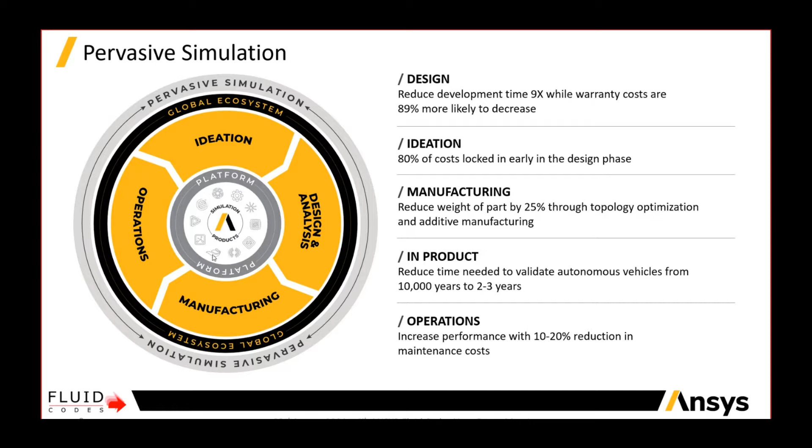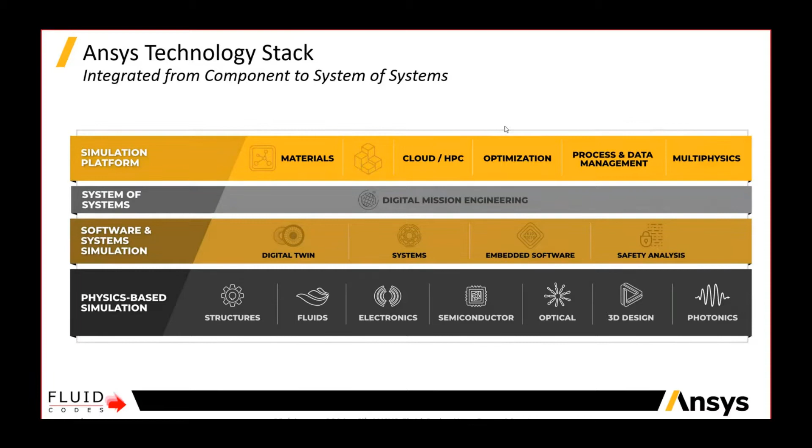On top of that, we have a set of tools that allows us to go on the cloud and process and manage the data, as per the previous presentation by Anne and Johan, of course in a multi-physics approach. So everything is there - this is an overview about the Ansys product portfolio. All the main physics are there, and as you can see, there are so many products. The effort in development at Ansys is going to give you more and more options, features, and capabilities through all these simulation tools - for electronics, fluid dynamics, and structures. There are so many, and we have little time to go through them.

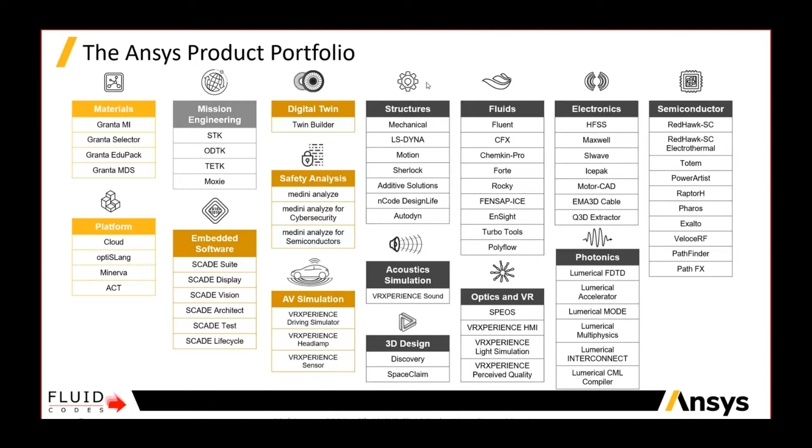Let me guide you through the Ansys 2021 release update for the main applications. I'm a CFD guy, so let's start with CFD. We can look at Fluent, for example, and there are many enhancements here.

For example, the user interface - there's a lot of new options for customization, for example the view, the dark theme is one of them. This improves the user friendliness of our graphical user interface, and we can also apply energy saving options. Of course, we are eco-friendly, so we want to improve that too. So why not?

Another kind of improvement relates to expressions - there's a lot of new features, like improving the readability of expressions using different colors or text styles to highlight what we are doing and what kind of information we need to input. There are new reduction functions, accessibility to new information, and applications for boundary conditions or post-processing purposes. So more flexibility and applicability of expressions.

Embedded windows and hyperlinks - again in terms of usability, we have this option available where new plots can be embedded in windows, so we can track during runtime what's happening in terms of monitors, both in static images or during the capturing of animation frames.

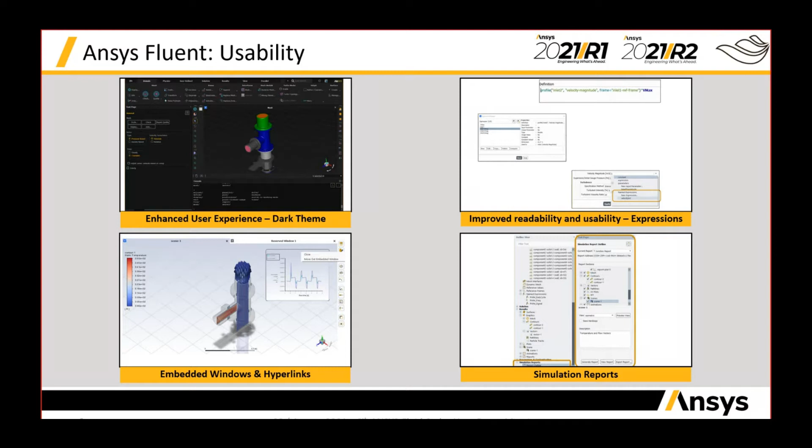Moving forward, if you look at the Fluent meshing development, this is an important task when dealing with simulation, since pre-processing and mesh generation is one of the main tasks we have to fulfill. So we need more usability on the meshing tools, and this is something that has been done in the last few releases on Ansys Fluent meshing, basically changing the settings for the clipping plane. Before it was just aligned to the axis. Now it's completely flexible, so we can put it as we wish.

There are also a few advancements for the progress bar, a smarter way to get this information. Based on experience, the progress bar itself is learning something, so it's getting more and more accurate with time using different simulation approaches. So this is another interesting thing.

And the common fluid formats, CFF formats, are completely extended. So we can save and load H5, HDF5 format mesh files.

In terms of transformation, we can extrude volume mesh. For example, on the inlet section or outlet section, we can extrude normal to the boundaries. This is especially used in case we want to stabilize the boundary condition, particularly for pressure boundary conditions. So we might need to extend the domain a little bit, and in the past this required going back, changing the geometry, remeshing the model and everything. But now we can simply add an extra task in Fluent meshing in order to extrude a bit out of the boundary condition to get this stabilization of the boundaries.

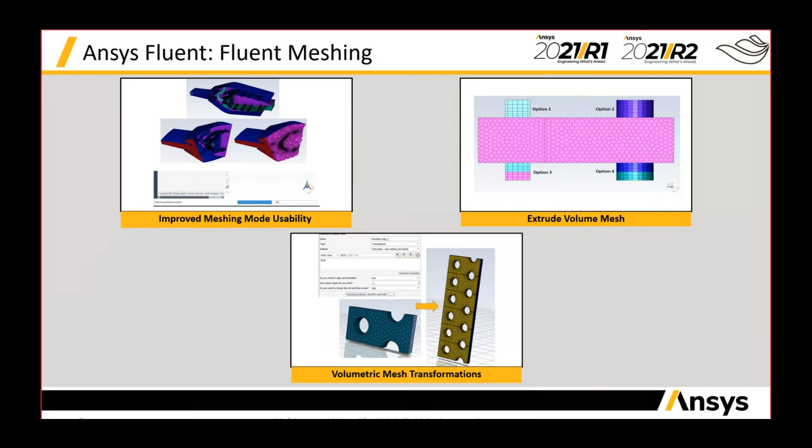When it comes to the solution mode, switching to the solver, we have a lot of advancement in multiphase. There's enhancement in volume of fluid applications, with a lot of improvement to get high fidelity solutions with improved adaptive time stepping and interface tracking, specific for this kind of application.

As I mentioned at the beginning, there are a lot of trends we are trying to address, especially electrification in automotive and aerospace. There's a lot of application related to gearboxes, so a lot of developments in this area to address fast spinning gears, splashing, this kind of multiphase with all the gears and details of the flow. There's a lot of effort in this application to improve robustness, accuracy, and speed up of the solution.

In the same way, if you look at DPM, the discrete particle model, again a lot of improvements here for better accuracy and HPC scalability. High fidelity tracking in case of dense particulates and overset meshes, and on top of that, scalability, pushing harder for complex systems and large cell count domains. So we have that covered with new applications and new solutions.

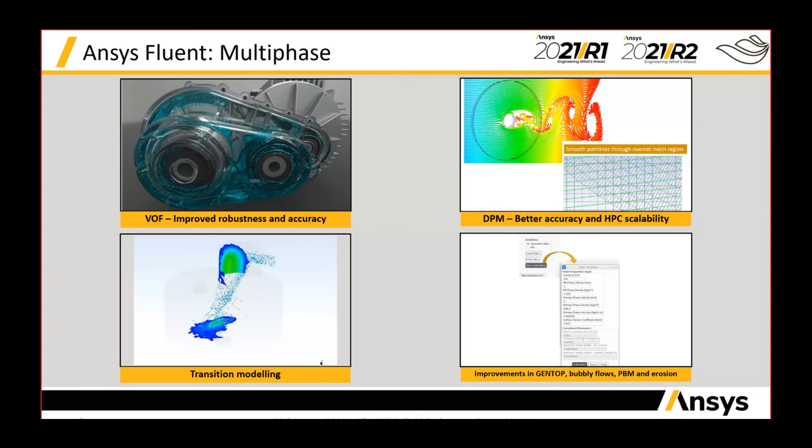Heat transfer and combustion, a lot of developments here, to accelerate the transient conjugate heat transfer.

Combustion modeling. In combustion modeling, again, a new trend, a very strong trend nowadays, is decarbonization. So there is a lot of improvements here. For example, the flamelet generated manifold has been completely revamped, and there's addition of new fuels like diesel and jet A1, for example, for particle injections, and everything is done in this frame of decarbonization.

So there is a lot of developments also for hydrogen combustion, hydrogen blending, and so on.

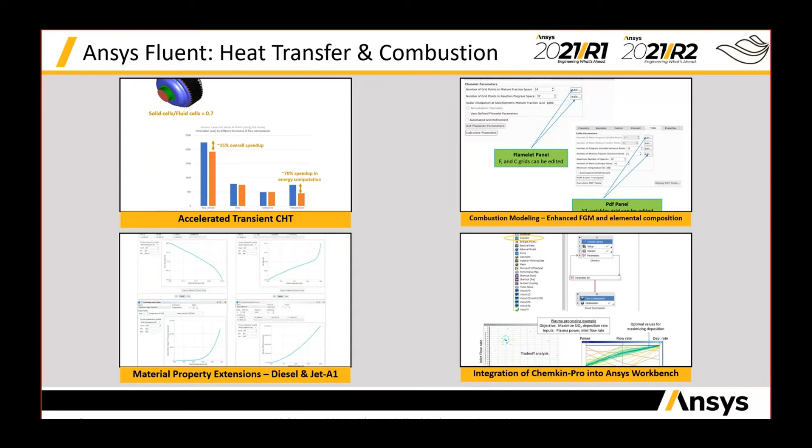Another important thing to mention here is the full integration of Chemkin Pro in Workbench. Now we can drive all the input parameters of Chemkin Pro in Workbench. That means we can get the output, so we can run simulation in an optimization frame, design of experiment frame, sensitivity analysis frame, and on top of that, because of Workbench, we can run through the Remote Solve Manager on a remote computational resource.

Development on battery modeling. This is another trend, again, for electrification. So direct exposure of the battery modeling in the graphical user interface - before it was just an add-on. Because of this integration, we have direct access to new capabilities and simplification of the workflow for battery modeling. So there are virtual connections, standardization of the UDFs, and so on.

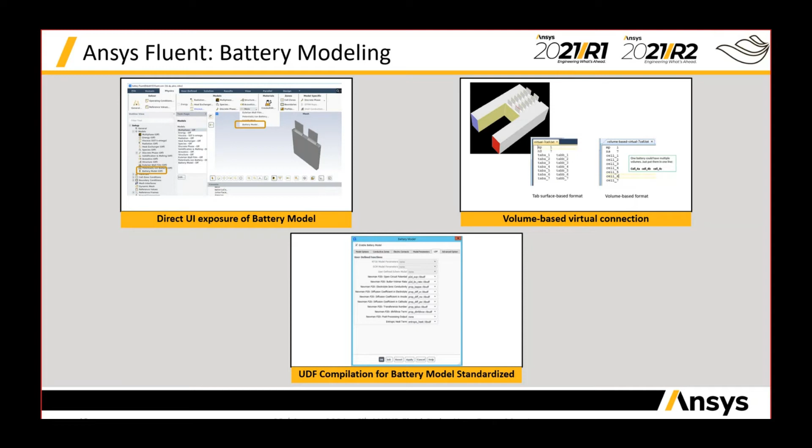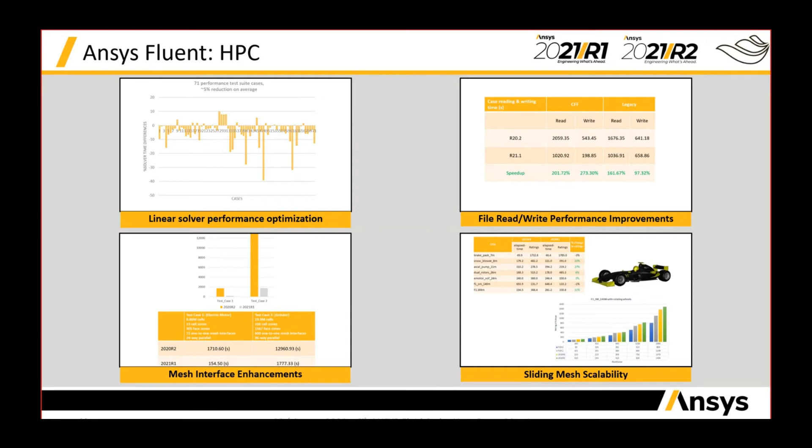Let's move now to the structural side. In terms of structures, there's a lot of implementation, mainly in Workbench, for the full integration of the many products available. So let's start looking into the meshing.

So there are new options available for repair topology controls in order to defeature the geometry at a mesh level, instead of going back, changing the geometry, and wasting our time doing that.

New capabilities to freeze and unfreeze the mesh through the geometry branch of the tree. Basically here we can freeze the geometry and force the mesh, freeze the mesh, in order to save some time when we are changing some parts of our assembly, some bodies in the assembly. So in this way, we can speed up the process here.

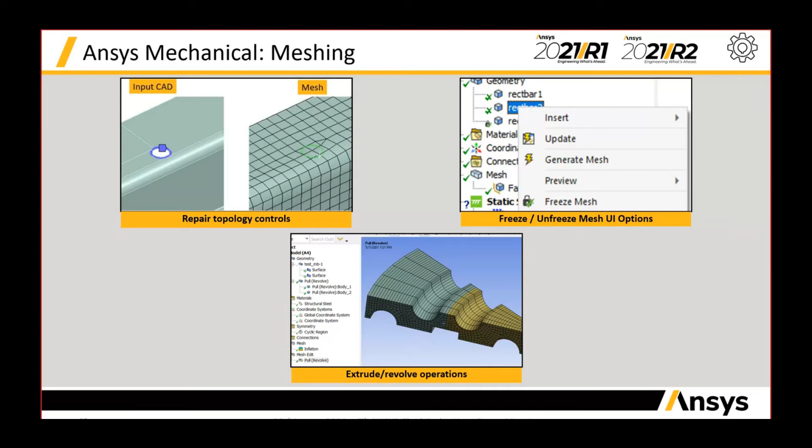Operation of extrusion and revolution, basically starting with a sheet body, then we can use a pull feature as a mesh edit operation in order to create this kind of 3D meshes. So start with a 2D mesh, and then we can directly extrude in the rotational direction or in the translational or rotational pull features in order to get the 3D mesh done in this way. So it's very easy and very fast.

Another advancement or enhancement in terms of system coupling, coupled field, new systems available in order to take into account complex physics, like the ones dealing with piezoelectric components, for example. So piezoelectric materials, there is a deep interest now in this kind of materials because of this electrification trend. So nowadays we want to solve this kind of problem. We have to add extra degrees of freedom, not just to the structural side, but also for the electrical part of it. So we need to have this complexity included into the picture.

Before it was done in a different way, now it is integrated in Workbench. So we have specific system coupled field for modal analysis and harmonic analysis. Something new here, something that allows us to go beyond.

New contacts. New contacts capability, for example, the projected 3D line to surface contact technology is now available. So in this way, we can optimize all these processes that before were giving a lot of issues.

Thickness. Now at the outline tree level, at the geometry level, we can use thickness scoping. So basically, we can add the thickness at elemental level. If you think of it, before you were just decomposing the geometry and applying at the shell level a different thickness to different parts of your device or equipment. Now we can go element by element to do this, giving a distribution of thickness at element level. So basically, you can see a lot of benefits here in the definition of problems related to erosion and corrosion.

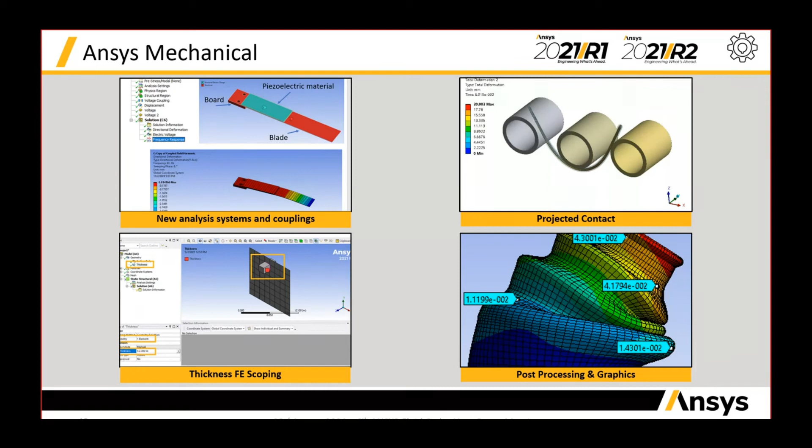Another advancement is related to post-processing. Now we have a lot of details like moving objects. So when we are magnifying the amplitude of the displacement, the probes are following the geometry, the deformation of the geometry. Before it was not like that.

Other advancement in LS-DYNA. Implicit features, this is an important feature to mention. There's a lot of flexibility added here, so we can switch from implicit to explicit in LS-DYNA directly in Workbench.

Advanced restart. Now we have a separate branching of restarting points, so we can add flexibility to, for example, add more parts in the restart.

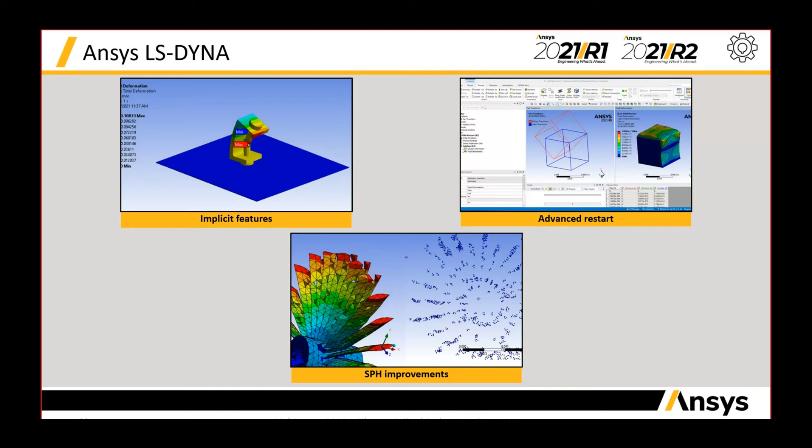And smoothed particle hydrodynamics enhancement. So we have a dynamic and automatic conversion of eroded elements into SPH particles. Improvements also in the arbitrary Lagrangian Eulerian method to handle large deflection, large deformation in both structured and unstructured ways. So from 2021, both of them are available.

A lot of enhancement in the contacts, especially for SPH applications. And something I want to highlight here in electromagnetics - solver enhancement also in this field, for example, including models for thermal runaway.

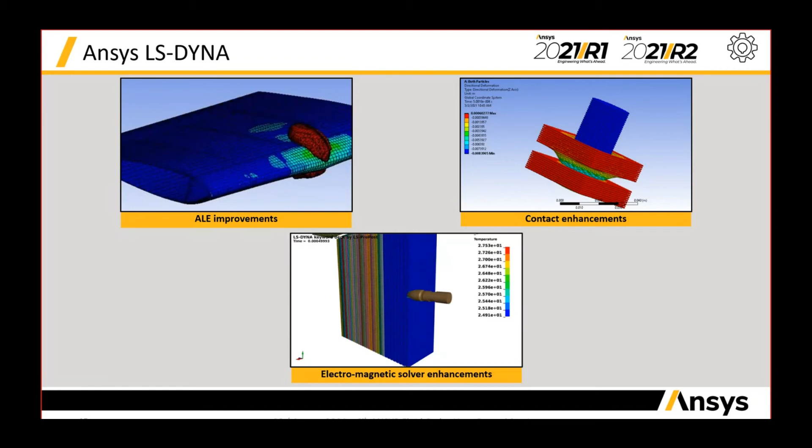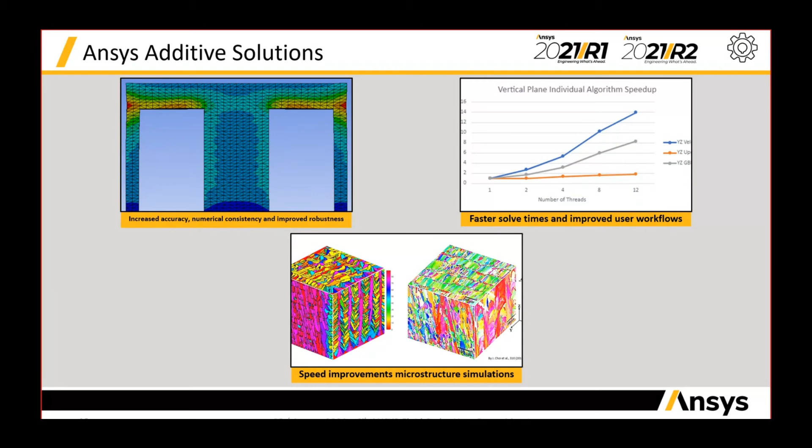Yes, additive solution. We have new improvements for the additive solution in order to speed up the solution, also for the microstructure simulation, and more models, improvement in the modeling to increase the accuracy and the robustness.

In Ansys Motion, a lot of developments here to deal with the contacts, so to improve the performance of shared contacts, soil interaction, planetary gear, so new toolkits available here in order to address this kind of problem. Simulation scenario where we can change, let's say, the execution, stop the solution, activate joints, and so on, based on the solution time for some functional expression, for example.

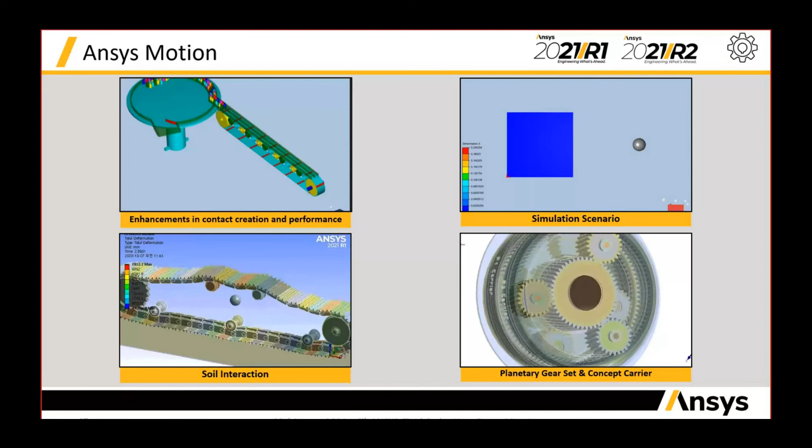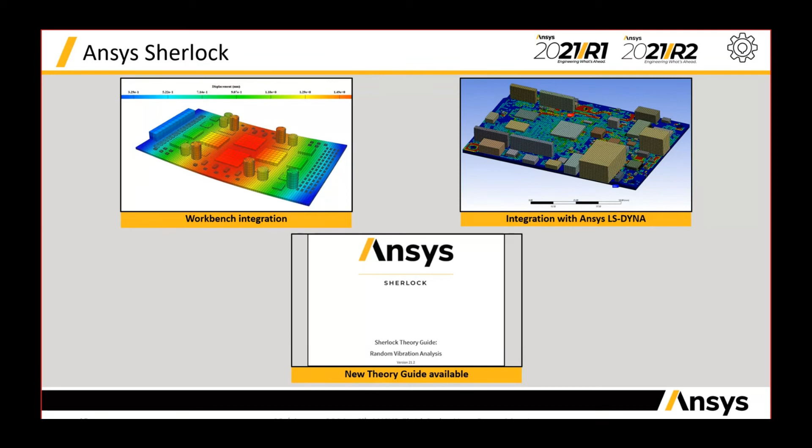Ansys Sherlock. So there's a full release of this plugin, so complete Workbench integration, so we can transfer easily all these settings from Sherlock to Ansys Mechanical or LS-DYNA, for example. Everything is there, and a new theory guide is available.

For HFSS, so we are moving to electronics. New breakthrough technology, mesh fusion workflow. Before, it was not possible to simulate different components at a system level. Now everything is possible in this way, so we can integrate several components belonging to the same system and run a single simulation to account for all of them. This is a breakthrough innovation, if you look at that.

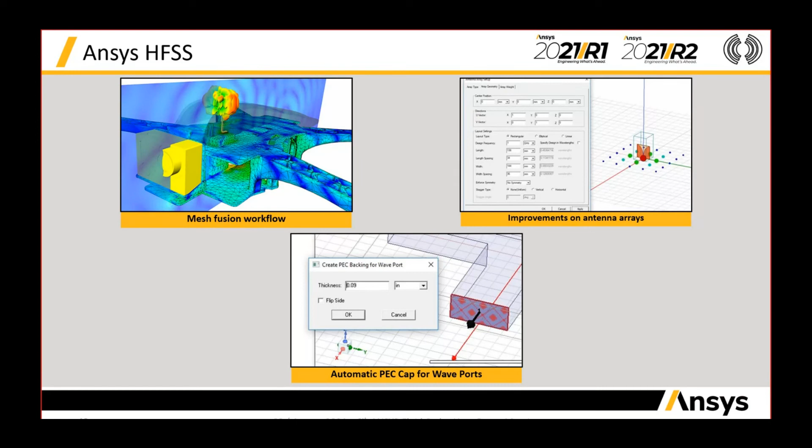Improvements on antenna arrays, from pre-processing to solution to post-processing. Automatic PEC cap for wave ports, so this is something that was requiring a lot of effort before, but now is kind of simplified. Parametric array conformal shape and volumetric 3D dielectric, so SBR+ here.

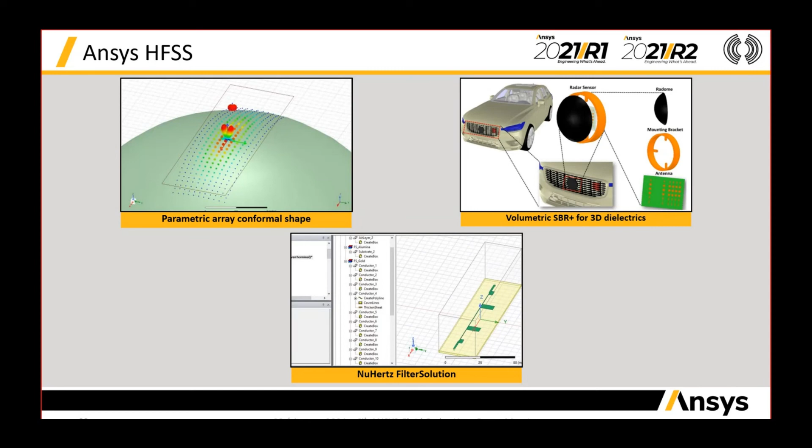So we can take into account, let's say, 3D shaping of the objects in order to account for the effect of those dielectrics. And NuHertz FilterSolution - this was a third-party tool that now is fully integrated with the Ansys electronic desktop. So it's like plugged in directly and can use to define and design, let's say, filtering solution for HFSS.

Maxwell, advancement in the definition of skew model, advancement that will allow us to speed up the solution in terms of 3D approach with the speed of a 2D simulation. Nonlinear impedance boundary supporting 3D transient, so we can change. There's a, let's say, innovative methodology to solve this problem in a very accurate and quick way.

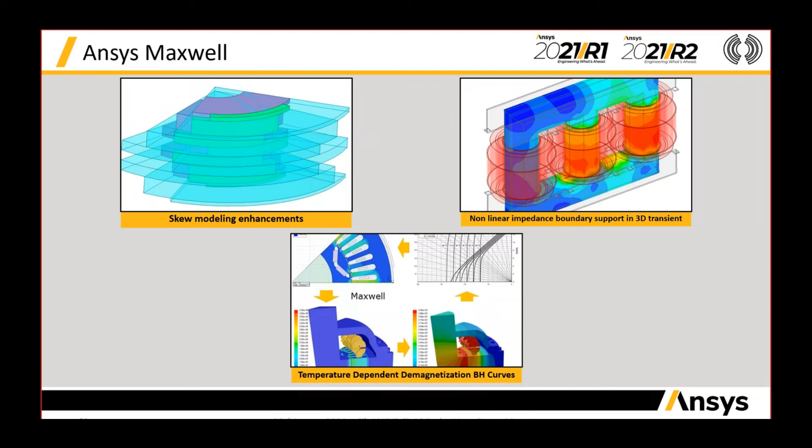And new features for temperature dependent demagnetization BH, so we can take into account the temperature dependence here. With Icepak, new features for native joule heating in the Ansys electronic desktop.

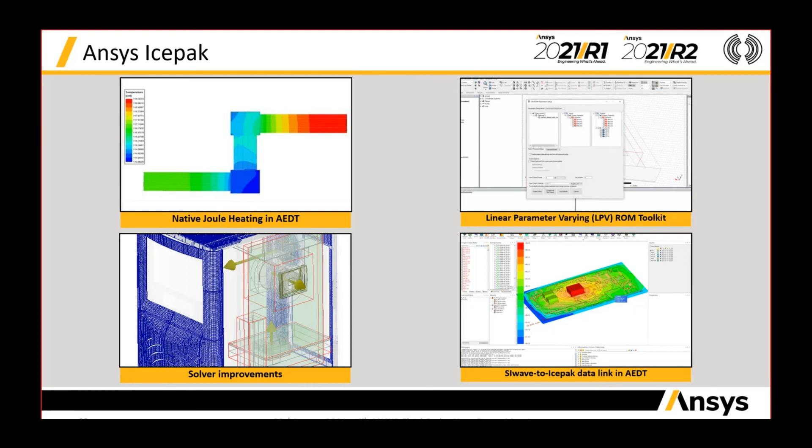A new workflow, actually a new toolkit, for ROM specification. Solver improvements for NCAD operations and solutions. And a SIwave to Icepak data link, so it's a seamless connection now in Workbench to take care of this connection.

Acoustics. We have general improvements in acoustics with new modeling in Fluent, new modeling in Mechanical. So aeroacoustics and vibroacoustics, generally speaking, have been upgraded in both the flagship products for CFD and FEA. There is a new workflow, DAVA, deterministic aerovibroacoustics. It's a full integration between Ansys CFD and Ansys Mechanical to run this kind of complex simulation, for example, cabin noise generation and so on.

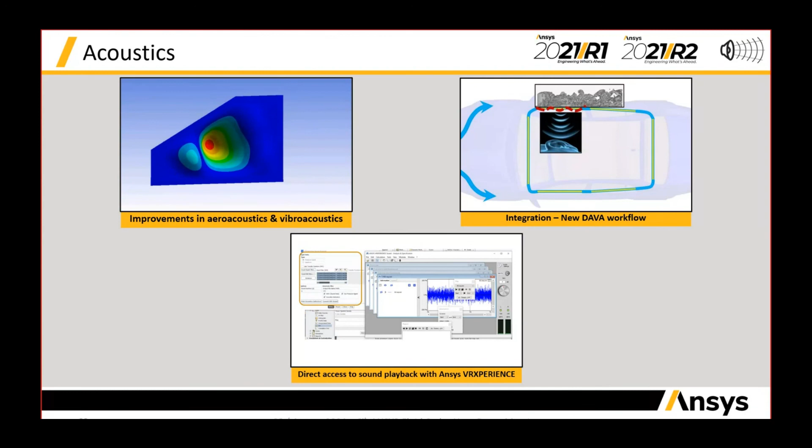Another important thing to mention here is an integration of VRXPERIENCE sound analysis into the flagship products. So basically, you can run a simulation and hear the sound generated by that directly into Fluent, for example, into Mechanical, into Ansys Motion, and so on. This is an important thing that is addressing this acoustic problem.

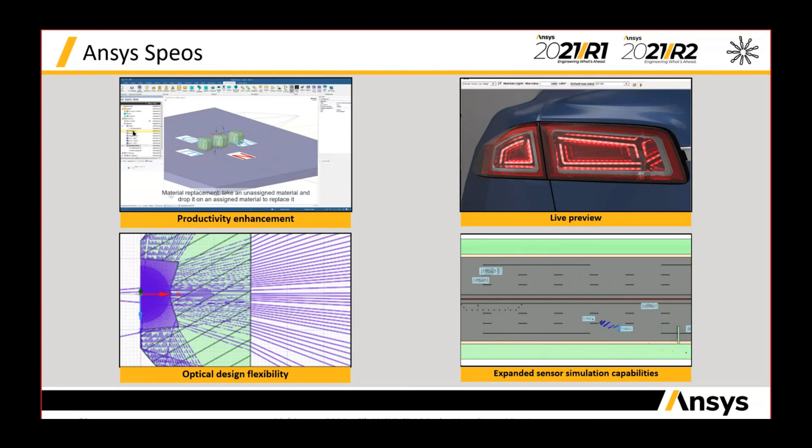And then we have expanded sensor simulation capabilities, so dynamic LiDAR simulation are now possible into Speos.

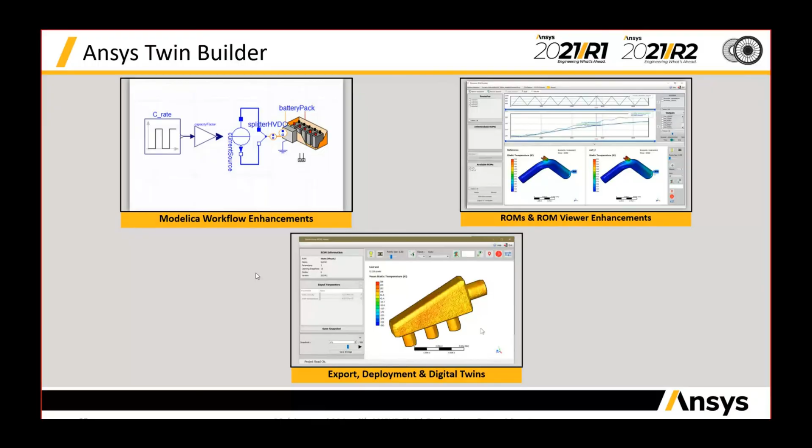And with that, again, Engineering What's Ahead is there, and with 2021 R2, we can get closer and closer to that. So with that, thank you so much for your attention.